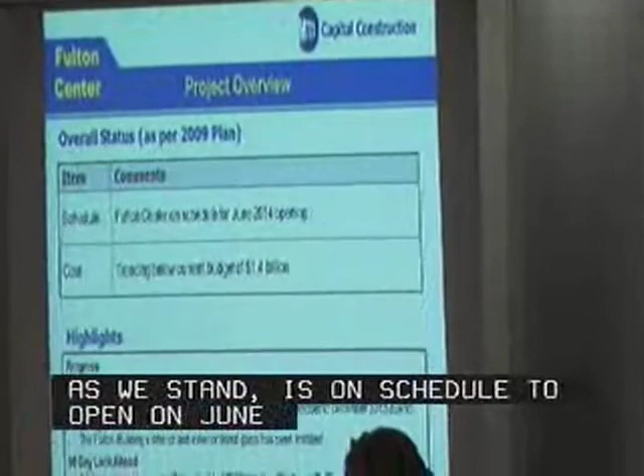Fulton Center, as we stand, is on schedule to open in June 2014, and we are trending under the $1.4 billion budget. The highlights of the progress is that we have 4 of the 5 elevators and 2 escalators on the AC mezzanine at this point in service. And we expect by the end of the month to have an additional elevator.

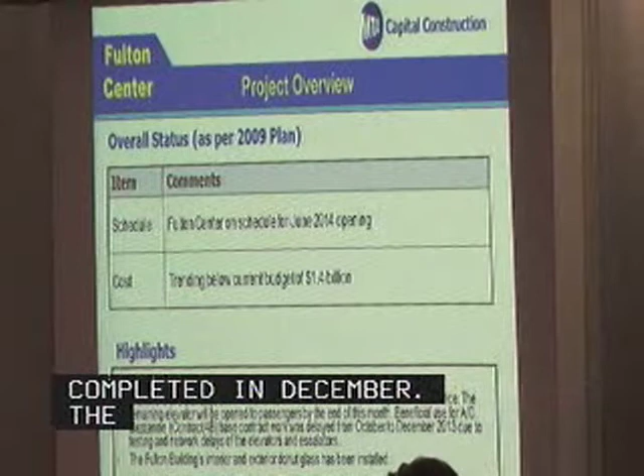So the beneficial use for the AC mezzanine base contract was delayed from October of this year. It will be completed in December. The Fulton building interior and exterior donut glass has been installed, and during the next 90 days we will have additional security scope that will be added to the AC mezzanine.

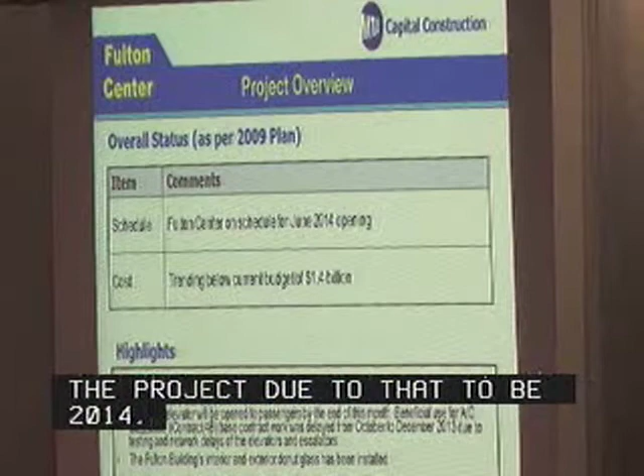The change order negotiated must be completed by 2013 in order for us to be able to use the GOs that start in the first quarter of 2014. So the target is in the next 2 weeks to complete the negotiations. We forecast the completion date of the project due to that to be 2014, although the beneficial use as the project was intended will happen in June of 2014.

Regarding our cost and schedule performance, in terms of the total project cost, the planned amount is the one that was planned for the total of $1.4 billion. Since at this point we are trending below it, and we expect to keep it that way. The third-party construction is slightly more, but we have been able to have on the soft cost part significant reductions.

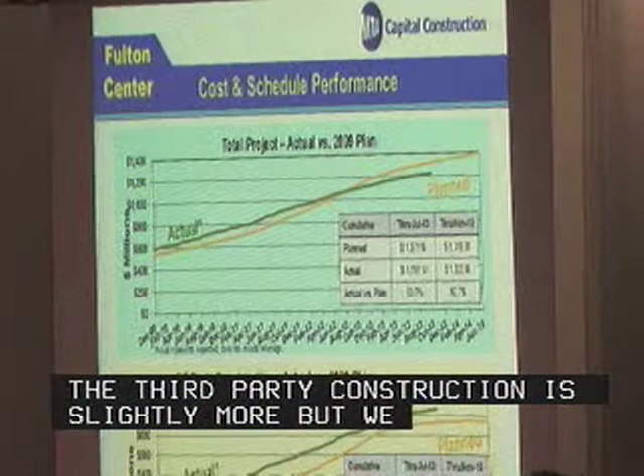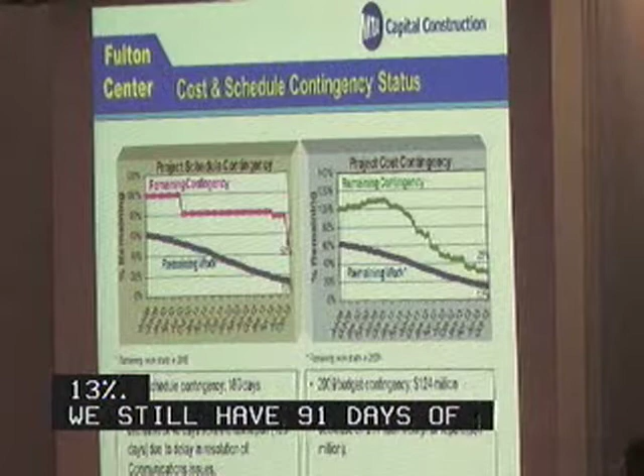The cost and schedule contingency status shows that at this point, in terms of time contingency, we have burned about half of it, while the remaining construction about 13%. So we have still 91 days of contingency at this point. As far as budget goes, the current budget contingency is $36 million. There was a decrease of $1 million from last month.

Some of the critical milestones, a master leasee, and this was something that was just voted for the Finance Committee, so we can now remove that as a critical activity.

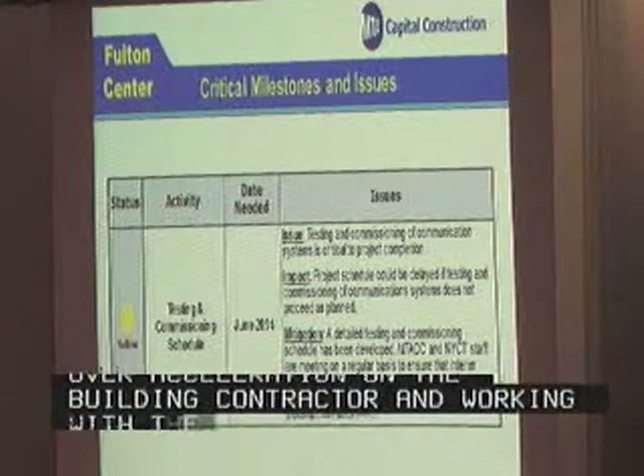We continue to do our testing and commissioning, and again, it's critical that we do it right. We have a detailed testing and commissioning schedule that has been developed by New York City Transit staff and our staff, and we're meeting regularly. At this point, we're looking at opportunities for acceleration on the Fulton building contractor, and we're working with them to accelerate somewhat. We want to create additional contingency time to the extent possible. That's as much as I can say about Fulton.

IEC project review of Fulton Street? You want me to click for you? Oh, you did, I don't know. That's a deal I'll have to think about, Michael. In our review of the project, we'll charge you for it. I'm afraid of that, but I'll get a volume discount, I'm sure.

In our review of the schedule and budget for the committee, we note the project schedule has slipped some 75 days since our report in September. The contingency remains a concern for us as to whether it's enough for managing any further delays to communications, the fire alarm, police radio, and other essential systems for the building's operation. We feel substantial improvements are needed in the testing and commissioning process to assure the June opening.

Project is on budget. Our assessment of the cost contingency really is depending on a late change to the design, which is going to put in some digital sign network for the master leasee. We're looking for a hard estimate on that and its implications before we can comment definitively on contingency.

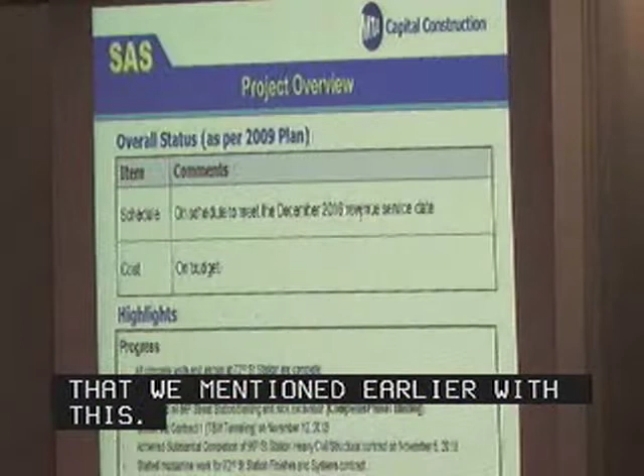Okay, Second Avenue. We are on schedule to meet the December 2016 revenue service date and on budget.

The progress to date: all concrete walls and arches at 72nd Street are complete. Completed restoration of gas and steam at 72nd Street. And at 86th Street, the blasting has been completed, that being actually the last blasting for the Second Avenue project overall.

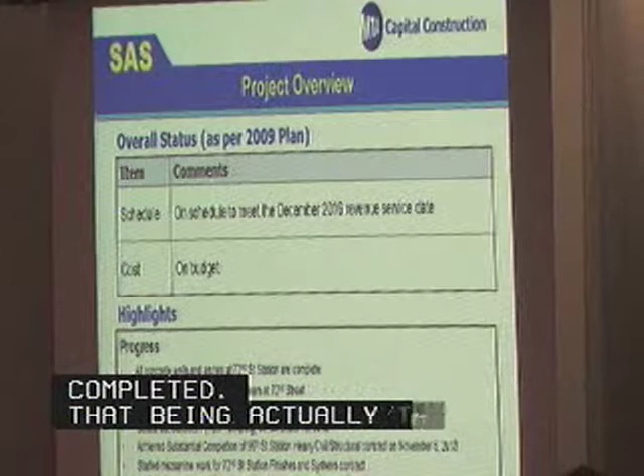We closed out contract one, the TBM tunneling, achieved substantial completion of the 96th Street heavy construction, and started the mezzanine work for the 72nd Street finishes and systems contract.

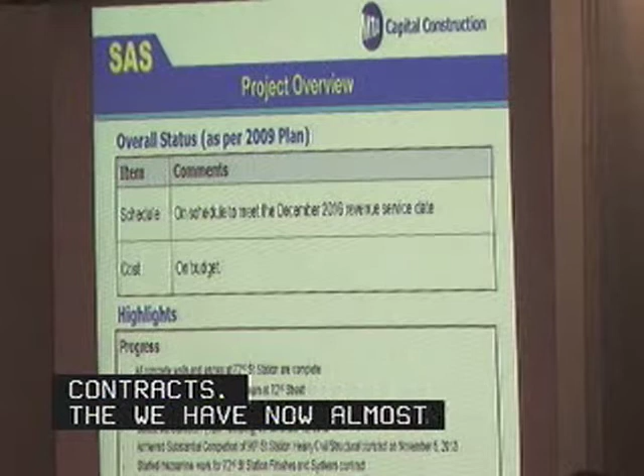We have now almost completed the removal of the muck house at 69th Street, and that will be completed in the next week or so.

90-day look ahead: we have additional gas work and structural steel underpinning at entrance 1 at 63rd Street, and we expect to achieve substantial completion of the 72nd Street heavy civil construction.

We're right now at 97.6% completion, and starting fabrication of facility power equipment at 96th Street. The arch concreting at 86th Street will start shortly as well.

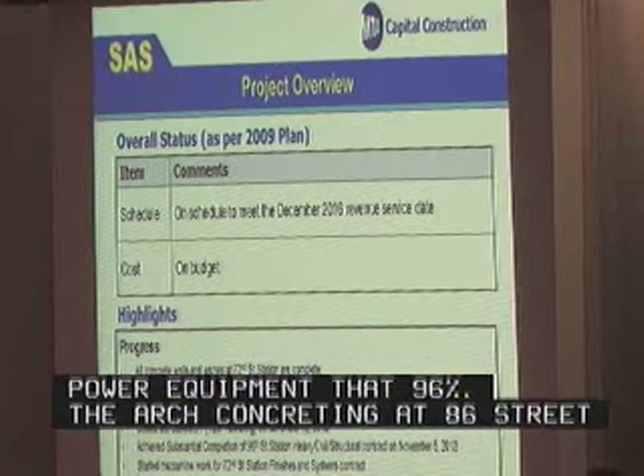In terms of cost and schedule performance, the overall cost is way below plan because we received very good bids and we have a lot of money in contingency. So both for construction and overall, when you look at the plan versus construction, we are below it — not because we're not making the burn rate, but because we're going to burn less money.

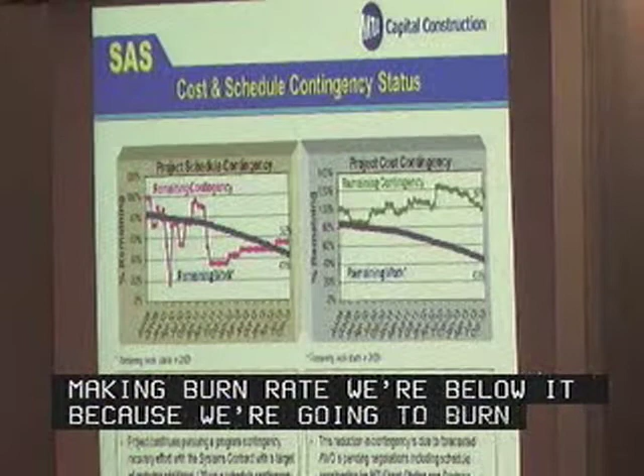When we look at the schedule, you could see that the contingency has been up and down for a while, and now is on the upswing. At this point we have 102 days of contingency, about 55% of the contingency, with about 43% of the time used. We're working right now to add another 120 days of schedule contingency with the system contractors, which will give us a better cushion of time for completion.

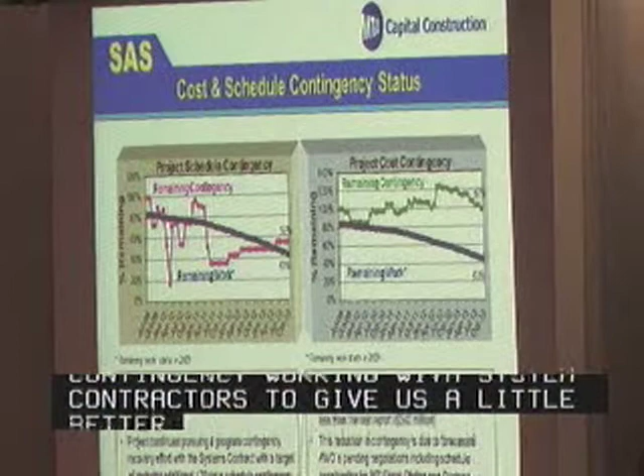Regarding the dollars, the current budgeted contingency is $312 million left. That is about 97% of the contingency, with 43% of the contract remaining to be constructed.

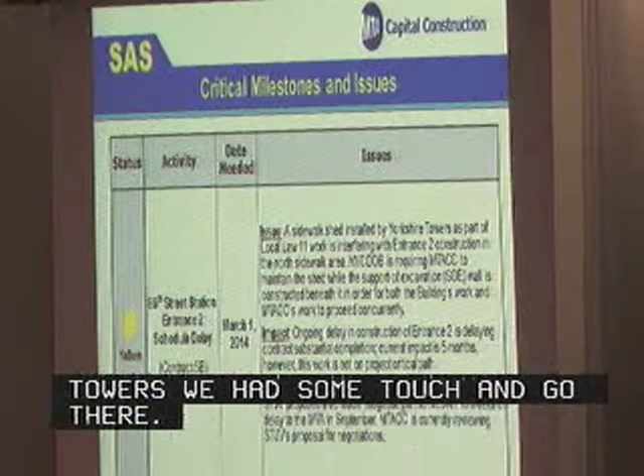The various critical milestones and issues: at 86th Street Station, entrance 2 had a scheduled delay — this was the Yorkshire Towers. We had some touch and go there, but we were able to mitigate it. We worked through Local Law 11 issues that were interfering with our creation of a cavern below. Long and short, that was finished and overcome, and we're working now with the contractor to mitigate the delays it created. But the work itself has been done by now.

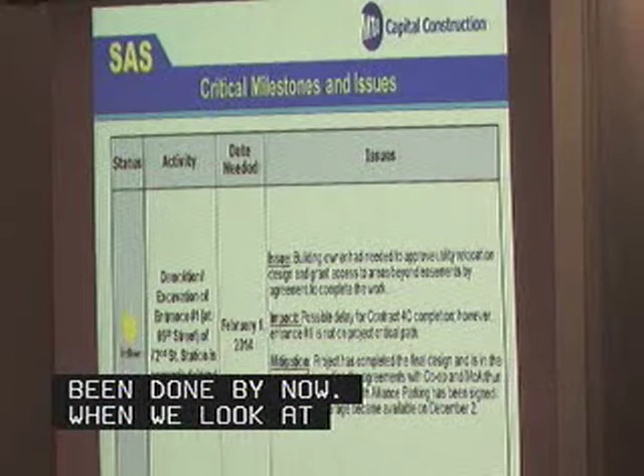When you look at 69th Street — this is entrance number 1 at 72nd Street Station — we had a long-standing issue with the building owners at 301 East 69th Street. We are now at the point that we've had extensive negotiations, and I was told we are signing the agreement today. So that particular issue is going away, and we can now proceed with the construction.

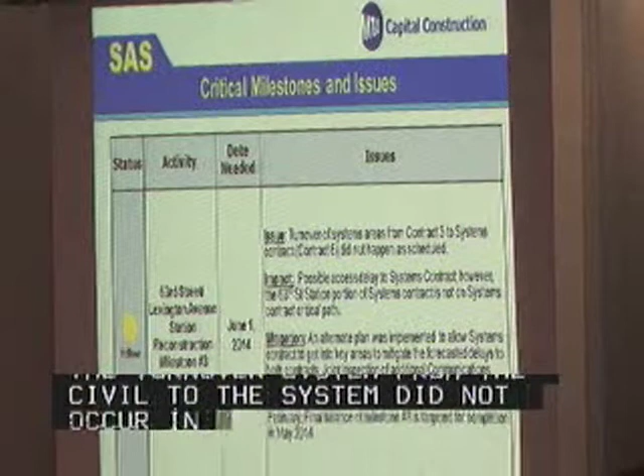This is the 63rd Street Lexington Avenue Station. This area is of particular concern because the turnover of systems from civil to systems did not occur on a timely basis — our contractor was late in delivering. We are, at this point, creating an alternative plan and working to mitigate that. Luckily, this is not on the critical path, which helps, but we are working to mitigate it anyway.

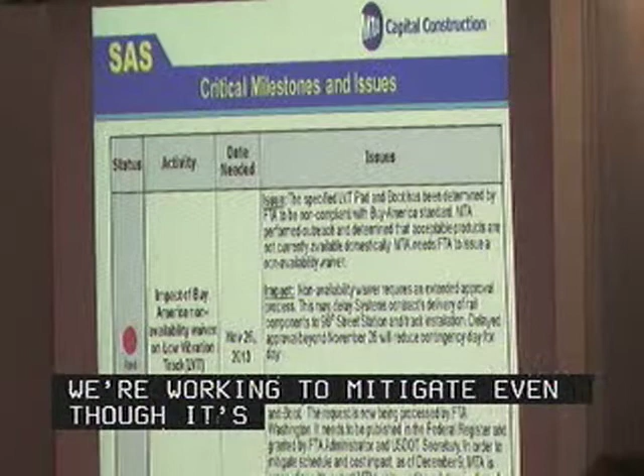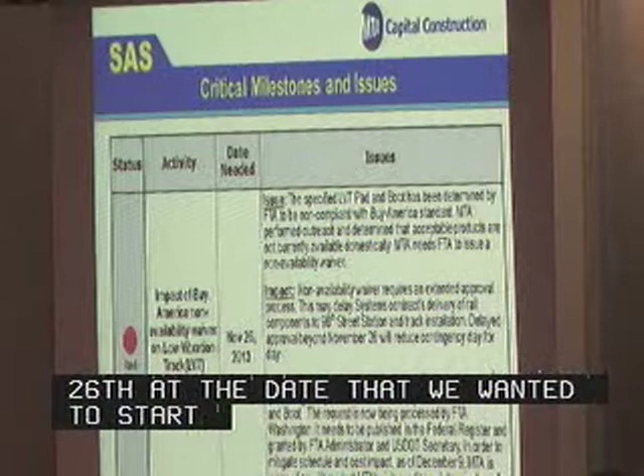The biggest issue here is the impact of the Buy America non-availability waiver. We have applied for one, and the feds have looked at it and are now publishing it in the Federal Register — nevertheless this is a rather slow process. Our critical path showed November 26th as the date we wanted to start construction; we're not able to do so. We have sent a letter to the FTA requesting the Buy America non-availability waiver, and we've also sent a letter saying that unless we hear from them by December 9th, we are willing to start the construction at our own risk.

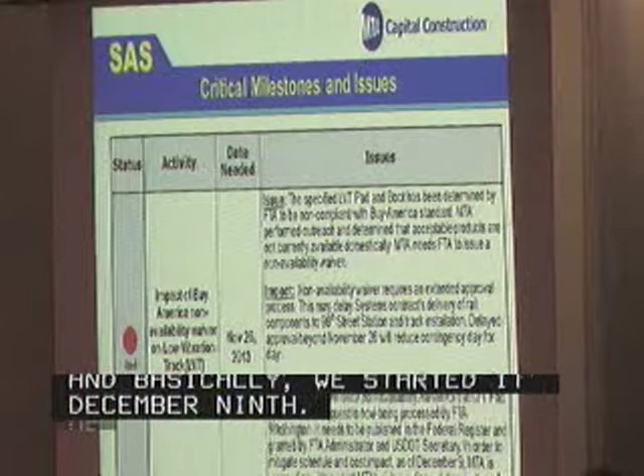Basically, we started at December 9th. We have lost about 12 work days in the process, but we expect to make it back on time, and we do expect to get the waiver in place. So we believe that at this point we have dealt with this, but we're still waiting on the non-availability waiver to be in place. The station facility power is also here.

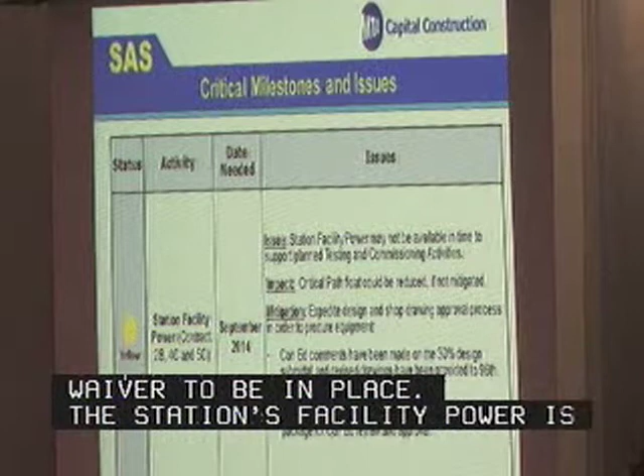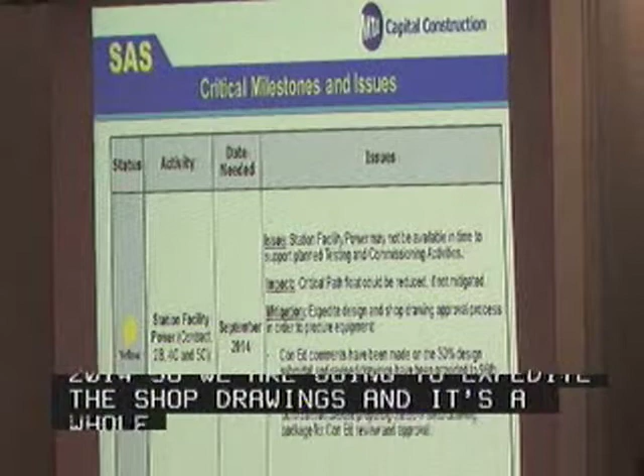We've learned from our Number 7 project that Con Ed's power is always a challenging thing to achieve and to get, and we are now trying very hard to make sure that happens on a timely basis. We need it by September 2014, so we are expediting the design, shop drawings, and the whole process to make sure there is a timely reply from Con Ed. But we keep that as a potential issue that we'd like to focus on to make sure it does not turn red. That's about it.

In our review of this project for the committee, we agree the project's on schedule. We do share the project's concern that additional cushion in the schedule contingency is needed. We see three things prominently pointing to that: one, the federal waiver that Michael just talked about; second, the likely delay to the provision of permanent power to the stations; and third, the extended duration of the systems contract itself, something brought out in our risk assessment of that contract, still remains unmitigated.

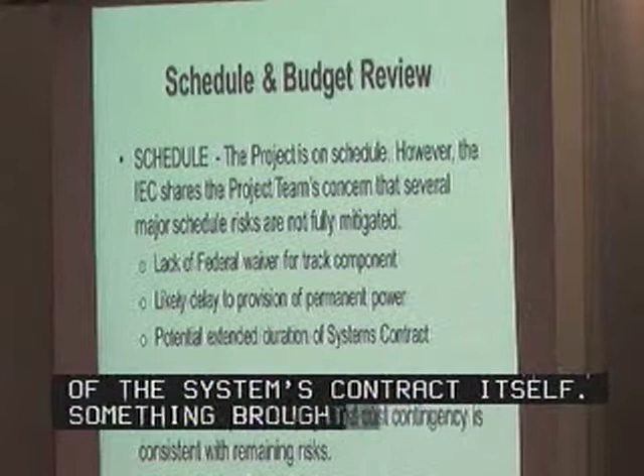The project is on budget. We feel the cost contingency is consistent with the remaining risks. We do want to bring to the committee's attention what we feel is a notable success with the 72nd Street Station mining and lining contract. This will be completed shortly. It's under budget by about $18 million at our last look, and within a couple months of its original schedule. This in spite of the blasting event we all experienced last August, Superstorm Sandy, with a delay in materials to the project which shut it down for a few days, and a continuing challenge dealing with community concerns over air quality, noise, and vibration. So we felt that in spite of those things, the project's construction management team has done an excellent job bringing the project home, and Capital's own community outreach program also deserves some credit for this success.

Looking to our recommendations, the only thing remaining deals with the turnover process talked about earlier. We brought this concern to the committee before, with the execution of turnovers from the finish contractors who were building rooms and putting in doors, floors, and lights, to the systems contractor, which is equipping those rooms with the gear necessary to make the railroad run. The project stumbled a couple times with initial turnovers at 63rd Street. These things are important for the success and for the revenue service date forecast, and we've given a couple recommendations for improving that process. This is something we'll be looking at closely in the next few months to see what improvements can be made.

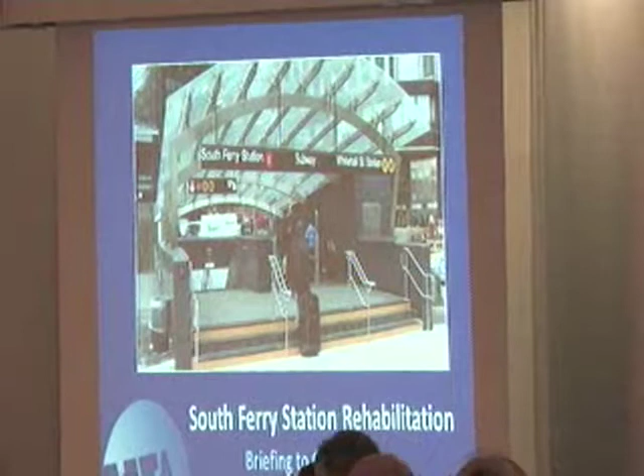Good afternoon, I'm John O'Grady. I'm Program Executive for Sandy Recovery and Resiliency for CPM, New York City Transit.

As we look at this first slide, we see that there's station signage on the top. The station signage calls for entrance to the South Ferry Station as well as the Whitehall Street Station. You'll also notice that there's a gentleman trying to carry his travel bag up the 3 steps. So this highlights 2 issues with the South Ferry Station.

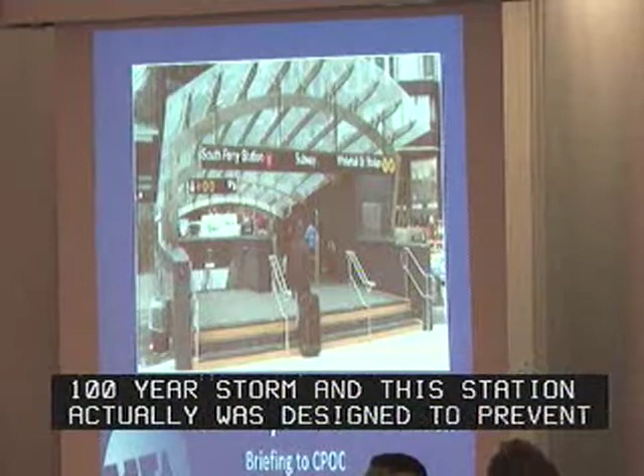It highlights the fact that initially it was designed for a 100-year storm, that's the 3 steps up. So this station actually was designed to prevent flooding. Furthermore, it was designed to incorporate a connection to the Whitehall Street Station, another great passenger amenity that actually wound up making the system more vulnerable, as it allowed for water to flood not just South Ferry, but across through to Whitehall and down into the Montague Tube.

The record storm, as we know, hit the city on October 29th. I'm not going to belabor the storm too much, except for the fact that we had done an extraordinary job preparing for the storm. It overwhelmed those preparations, and at the same time, it clearly overwhelmed the design parameters for which the South Ferry Station was designed. We are now elevating our design requirements to resist a storm that brings a surge accompanying a Category 2 storm plus 3 foot extra.

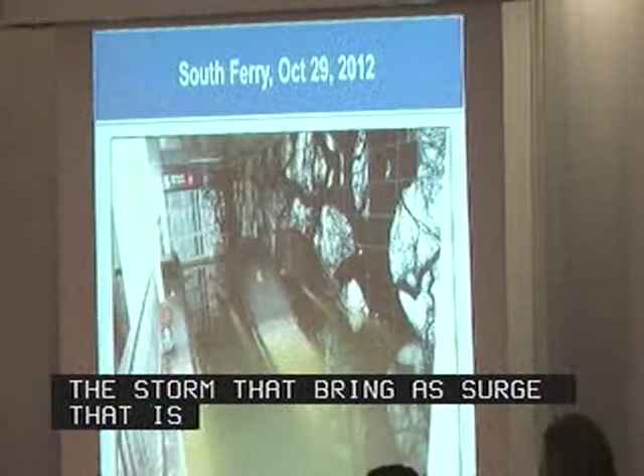As you can see in the third photo here, the station was flooded with over 14 million gallons of brackish, salt, highly contaminated, fouled water. It took close to a week to pump out the station from all the water and remove some of the larger components of debris from the station.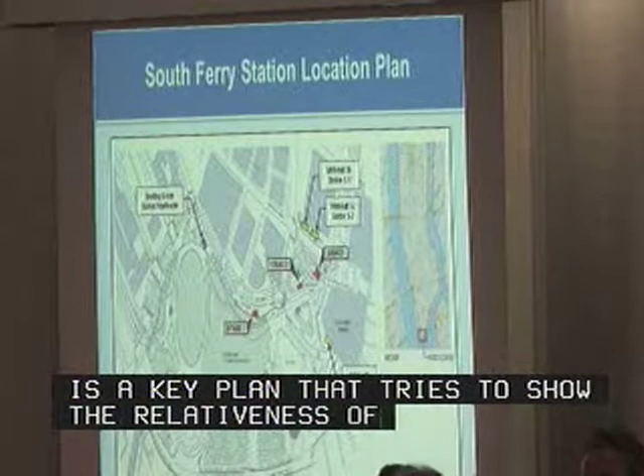What makes the station vulnerable is this key plan that tries to show the relativeness of the Whitehall Street Station. You can see on the slide the 2 light green entrances, station entrances S1 and S2, that connect over to entrance 1 of the new South Ferry Station. The new South Ferry has 3 entrances, entrance 1, 2, and 3.

And then, of course, a little bit further up on the slide, you get to see the Bowling Green, trying to show the relative nature of 3 major transit components of the overall transit network. If we move to the next slide.

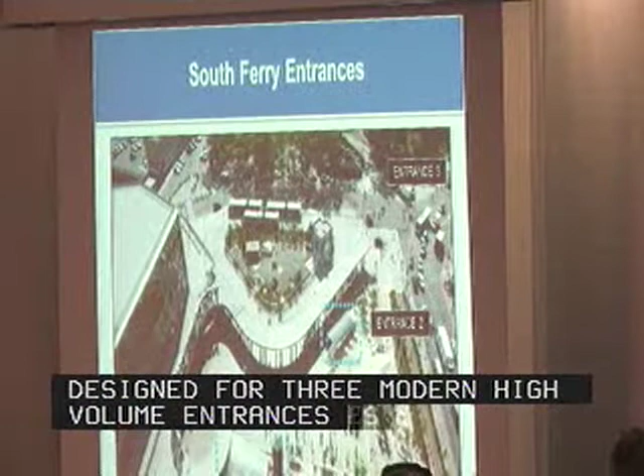South Ferry was designed with 3 modern, high-volume entrances to allow for the surge traffic of the arrival of the Staten Island Ferry. These entrances on their own provided a large volume conduit into the station when water flooded. So as much as we needed the wide entrances to accommodate passenger flow, it wound up being a weak point for the system because it allowed a large volume of water to quickly flood the system.

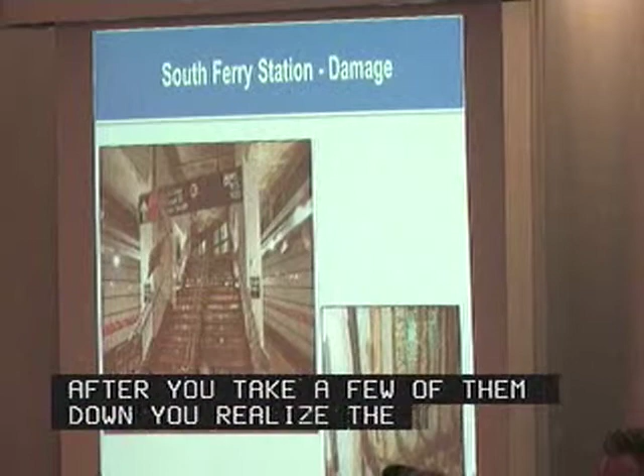Damages aren't necessarily immediately obvious. You start to clean out the station, you see that the porcelain wall panels look like they're okay. It's after you take a few of them down that you realize the damage the moisture has done to the mounting brackets that hold these components up. We can't have those brackets fail and allow the wall panels to fall onto the tracks.

More insidious, though, is the damage to electrical and mechanical components, as illustrated by the photo on the lower right-hand corner. Corrosion of cable, any connection point, any terminal board, any splice point, basically puts the system at risk of a failure, and it is something that needs to be remedied.

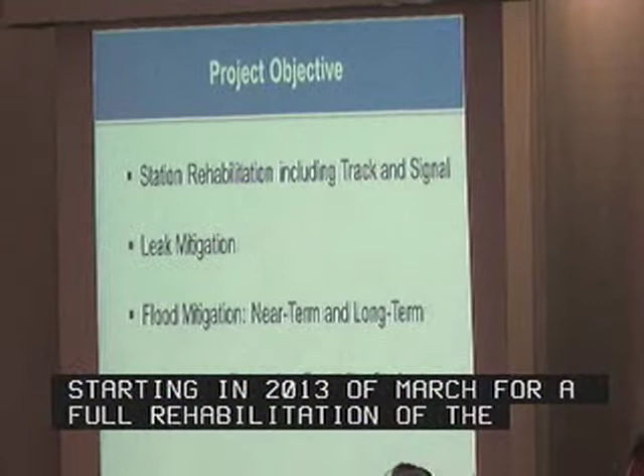So we embraced the project starting in March of 2013 for a full rehabilitation of the existing South Ferry station. This basically means the station will be gutted down to the concrete, and we'll be putting in all new systems, all new finishes, all new lighting, all new mechanical network, all new signal systems, etc. We also will be including necessary track and signal work, which is unusual for a station rehabilitation.

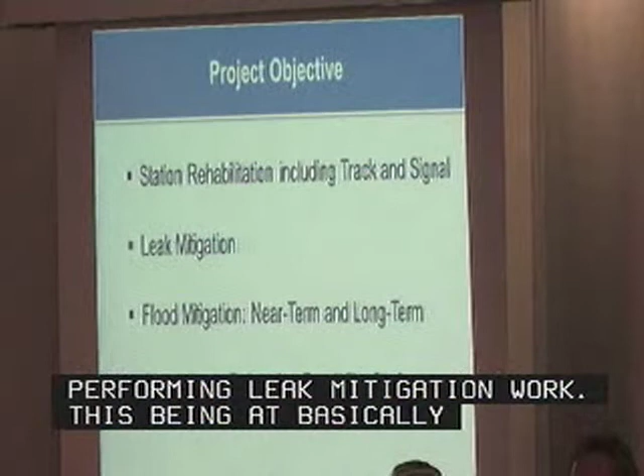Along with that station rehabilitation work, we will be performing leak mitigation work. This being basically a station sitting in reclaimed water and landfill, it's highly vulnerable to water infiltration. Even when it opened, it had a good bit of cracks that allowed for leakage into the station. These cracks were exacerbated by the flooding and weight of water caused by Sandy. So we'll be going in there with a very aggressive program to seal off these leaks.

We will be embracing both near-term and long-term flood mitigation as we move forward, and to make this station fully resilient, we are looking at the feasibility of relocating the most vulnerable component of the station, the signal relay room, to a point above grade where it does not flood.

To get there, we're breaking this project down into construction packages. We have a near-term mitigation package, which was awarded in September of 2013. That package is closing 2 of the entrances that are not necessary currently.

As everybody knows, the South Ferry Station has been closed since the storm. So we had entrance 2 and 3 that provided a vulnerable access point for water should we ever have a storm like that again. So we're closing them down on a temporary basis until this project can come along and reopen these entrances such that they're capable of withstanding a Category 2 hurricane flood.

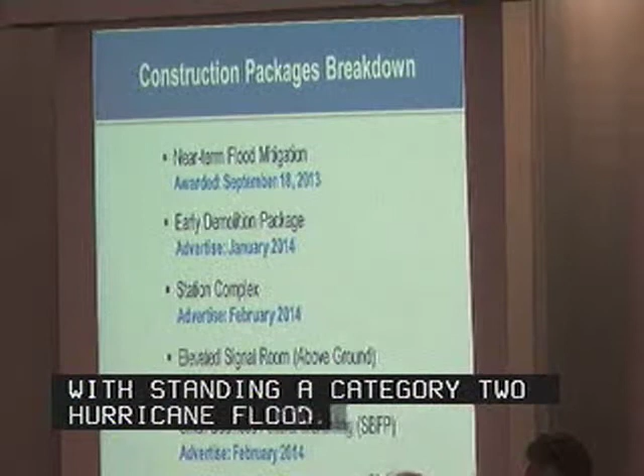You're talking about closing down entrances to the old South Ferry Station or the new one? No, we're closing down the entrances to the new South Ferry. Well, nobody's using it, so it shouldn't affect anybody. That's correct, it doesn't affect anybody. It's just that there's concern over that. But they're flooding points, so that's why they're closing them down.

We're also doing other mitigation as part of that early near-term mitigation. We are going to be advertising an early demolition package, removing all unnecessary components within the station, essentially preparing the station for the larger contract work. The station complex work, the overall package, will be advertised in February with a planned May-June award. We are going to continue to study an elevated signal room, and we are looking at our current contract packaging to see what projects, if any, can be broken out for small business mentoring.

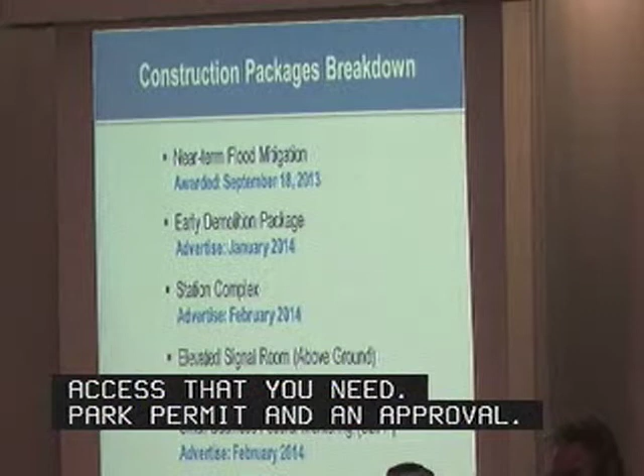One of the problems with this location is that there is very little access. Any construction access you need requires park permit and approval, and we're going to have a problem with multiple contractors in this area. We also are procuring a consulting construction management firm to manage the project on behalf of Transit.

The South Ferry Station, as you look at it, let's see if I can show the pointer here.

It bleeds out, but entrances 1, 2, and 3 are on the top along State Street. So we'll be hardening those entrances such that in the event of a storm, we'll be able to come along and close a door flap, close and seal off those entrances. The rest of the entrance itself will be designed for a Category 2 storm, so everything will be completely sealed off at street level.

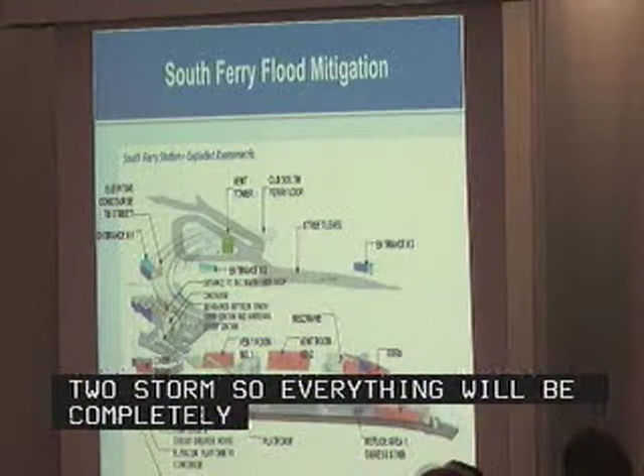As you move down the station, we're doing second-tier hardening. We're hardening, for example, the connection point between South Ferry and Whitehall. It doesn't really quite show up here, but where that connection is, we'll be putting in a barrier to prevent water from surging across and through from one station to the other.

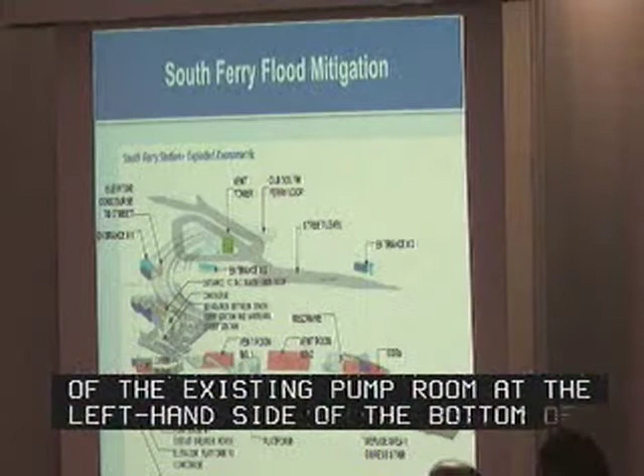We will then be taking the hardening and bringing it down to platform level. We will be expanding the capacity of the existing pump room at the left-hand side at the bottom of the drawing there, basically doubling the capacity. We'll be hardening the rooms along the platform.

And then finally, as you get to the lower right-hand corner, you get to the signal relay room. That's basically our largest challenge now as we move forward. The signal relay room is the most vulnerable room in the station complex, and yet it's at the only really good location within the station that it can be.

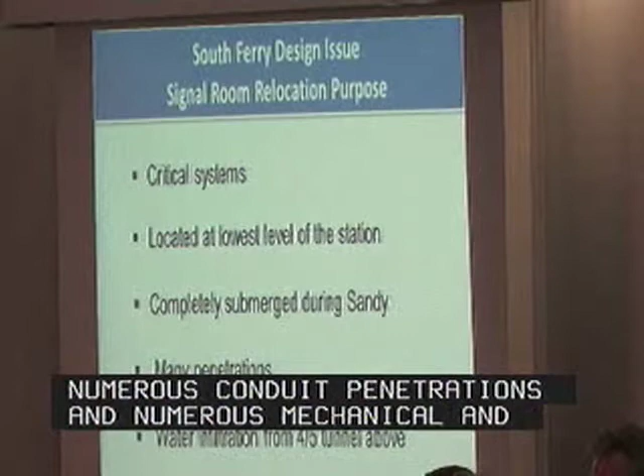It houses all the critical signal systems. As I said, it's at the lowest level of the station. It was completely submerged during Sandy. It has many different wall penetrations. This is a room that's 20 feet wide by 110 feet long, so it has numerous conduit penetrations, mechanical louvers, doors, and vents. It's also vulnerable to water infiltration from the IRT 4 and 5 line above.

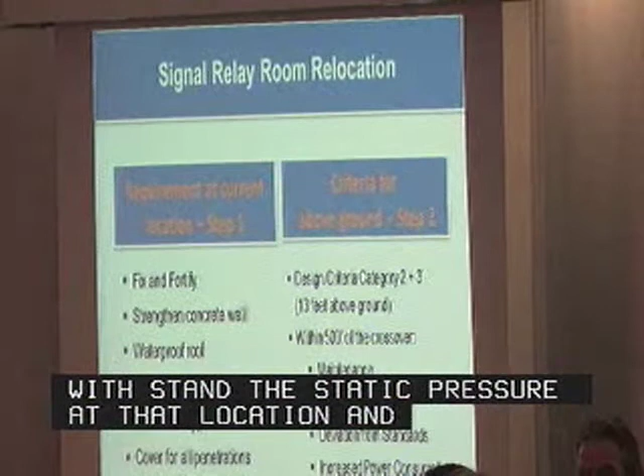So our approach currently is to harden it in a two-step approach. The first step would be to harden the room in its current location. We're going to take advantage of the term fix and fortify. We're going to strengthen the concrete wall to withstand the hydrostatic pressure it would be under should it flood again at that location. We'll be waterproofing the roof and installing submarine-type doors to close off in the event of another storm like Sandy. We'll be having deployable covers for all penetrations such that the room will be made as watertight as possible in its current location.

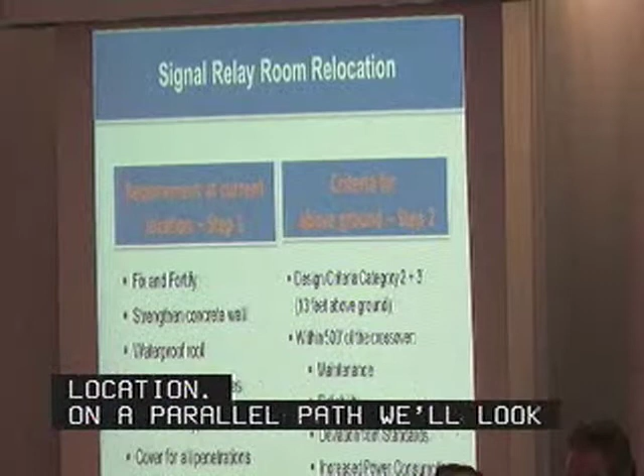On a parallel path, we're going to be looking at every option to bring the room above grade. There are requirements to that—it's not as easy as just putting it above grade and finding a spot. It has to be within 500 feet of the crossover, which is the track switch that allows you to move from track to track. That 500-foot rule is there for maintenance and reliability reasons, so it creates quite a challenge.

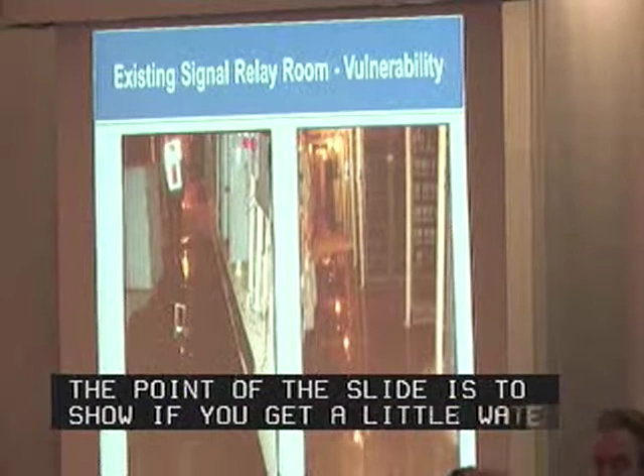But from the next slide, you can see that the existing relay room is vulnerable to even a small amount of water. The point of this slide is to show that if you get a little bit of water on the floor, that may be okay, but as it starts to rise up, it starts to get into the relays that terminate in the racks you see in these photos. So we don't have any real true resiliency in this complex unless we get this room above grade.

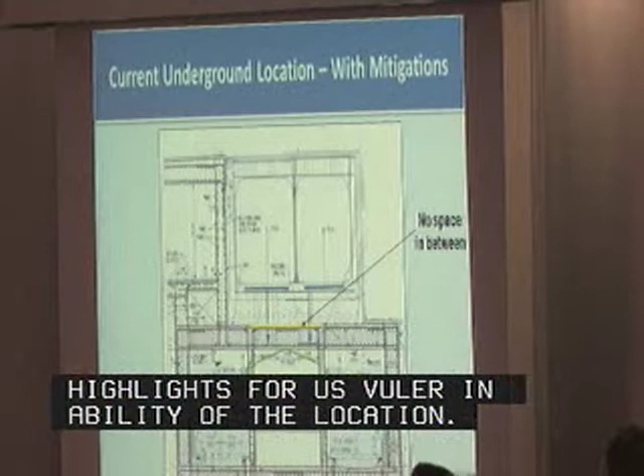So as I said, this is just a plan view of the relay room where it currently is, hardening every aspect of this room to the point that we can, as well as hardening the entry points to the station at street level. But the IRT above, the next slide, highlights the vulnerability of the location. Essentially, we have a 100-plus-year-old track and structure configuration above us that has its own issues, and it can leak from structure to structure, basically leaking into the relay room. So we're going to try to build a roof within the room, but even there we have very little headroom to deal with.

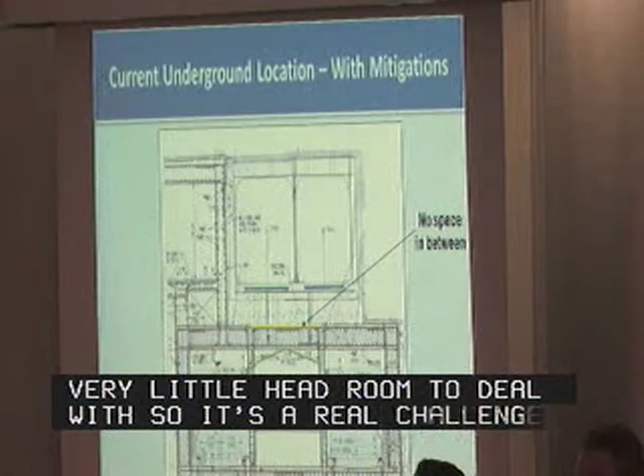So it's a real challenge. As you can see in this photo, water on either side of the relay room, if the tracks flood even to a nominal height, can enter this room and cause substantial issues. The signals themselves are the long recovery item with this project, bar none.

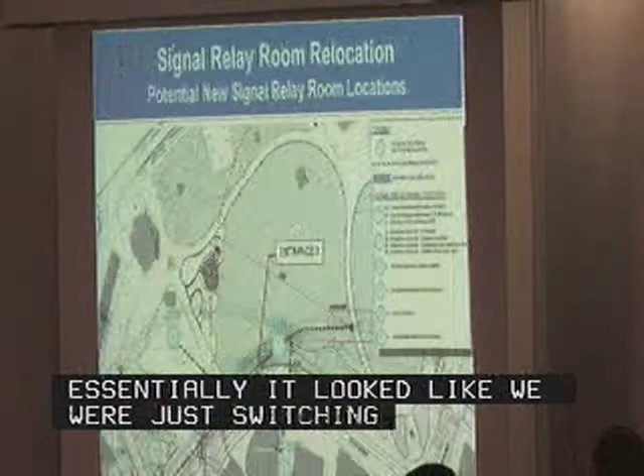We were asked as we were putting this presentation together about other locations. We did look within the station, just for full disclosure, and essentially it looked like we were just switching one problem for another while still not really achieving full resiliency. Above grade, we have a problem—we would have to go into the park. So we've looked at all locations within the park, and there are no good locations in Battery Park for us.

The only good thing about the arrangement is that where we are is along the perimeter of the park. Actually, we're along the sidewalk, and that sidewalk does not belong to DOT, it belongs to Parks.

But with the property being Parks property, we know we're in for a long process. Even if everybody buys into putting this room above grade, the alienation process to take that parkland, even with all parties agreeing, would be quite substantial. So we've reached a point of decision on the direction we're moving forward with.

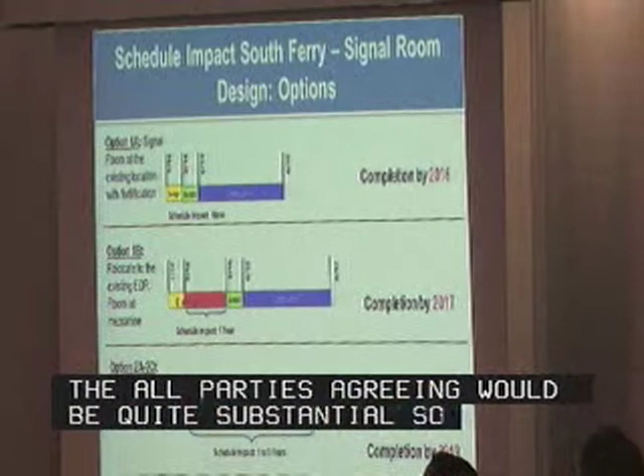We're moving forward with the first option, hardening the room in its existing location. That is the path that takes us to a completed project the quickest. We will be finishing the project by the end of 2016, so we're in a 24 to 30 month duration.

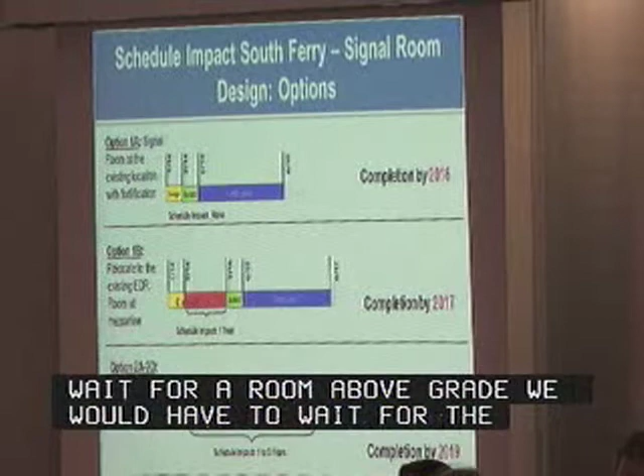If we were to wait for a room above grade, we would have to wait for the process to play out. It could be involved, could be challenged legally numerous times, and we might not get approval, in which case we'd be waiting in vain. But even if successful, we feel it would add 1 to 3 years to the project duration. So if we waited for that, at best we'd be at the end of 2017, to as late as 2019.

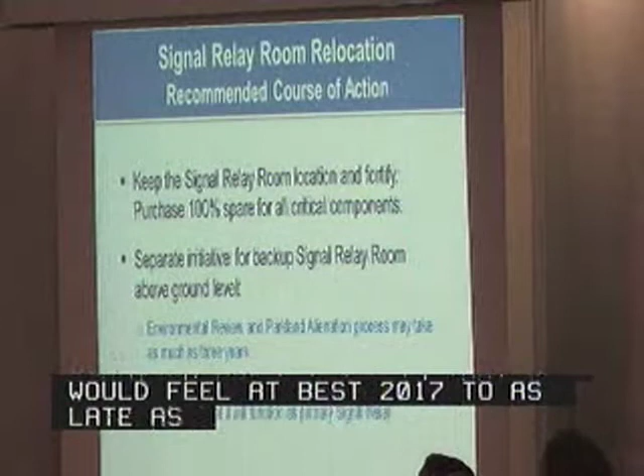And we don't think we can wait for that, which brings us to the course of action we're on: hardening the room in its current location. We will purchase 100% spare signal components to be able to recover should we ever have any form of flooding event again. And we'll begin on a parallel path to seek out a room above grade to the maximum extent possible, using this as a fallback facility until it's approved and built, at which point it would become the permanent facility for the relay room. And at that point, we would have a fully resilient South Ferry Station.

The one comment I didn't make as we went through the presentation is that at this point we are well within the allocated budget for this project. I'm not here to talk about total dollars yet because we're just finishing the design and getting the final estimates done, but we expect to deliver this project well within the allocation in our Sandy funding. Thank you very much.

I think the group has done an excellent job dealing with a very difficult situation. And while this may be a one-off that we may not face other places, there may be derivatives of this that we will face. Ideally we'd like to take actions that were permanent and one-time expenses. This is a case where we may need to do something different. And as we get to some of the more challenging assets we need to harden, especially on the resiliency side, you may see more of these. But the process they went through, I think, was good.

And we make sure we communicate this very clearly to the FTA, because they want to make sure we're spending our resiliency dollars and recovery dollars wisely. Any questions or comments?

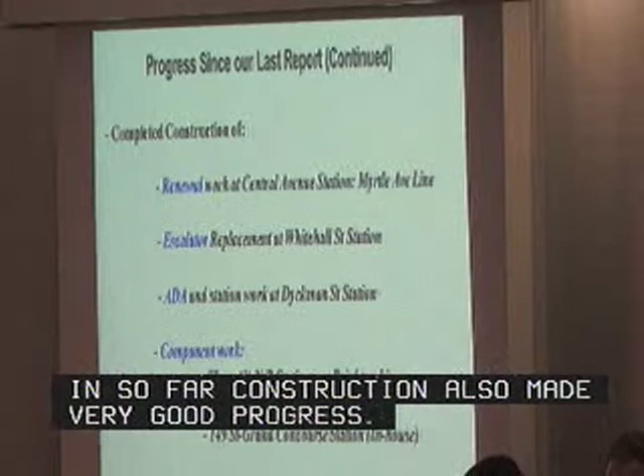We also awarded 5 stations on the Liberty Avenue line, and elevator and escalator projects were also awarded. In terms of construction, we also made very good progress. Central Avenue station on the Myrtle Avenue line was reopened on time, and earlier this year we completed Knickerbocker, so overall that line's work is going very well. The Whitehall station escalator was put in service, and this week we are putting Bowery station in service. Finally, we also completed the ADA work at Dyckman, along with 5 other component works at 5 other stations.

Dyckman, everybody knows, was a big challenge for us, but I think we put it in service now. In terms of the component work, the 3 stations on the northbound side, we put it in service ahead of schedule. At 149 Grand Concourse station, this work was completed by our in-house force, and it turned out to be very good. In fact, New York One has a very good article about this project. Also, the 5 station on Broadway, I talked about it.

Now, this is our overall capital program for stations. Total work included at 187 stations with 4 major categories. You can see the major effort is component work, and I put in a real plug for the component station program.

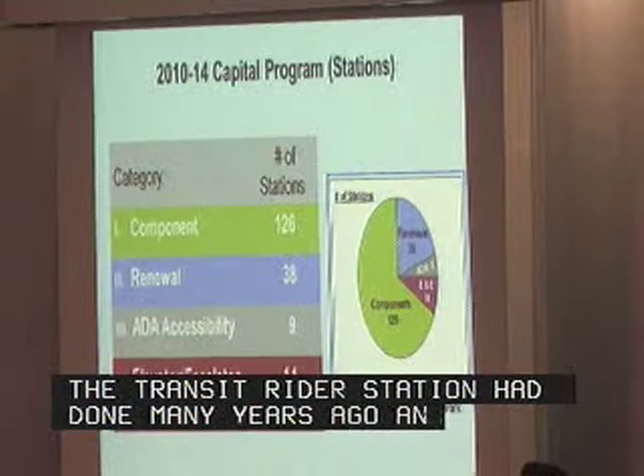The Transit Riders Council had done, many years ago, an expose of some stations, and 149th Street Grand Concourse was really decrepit, and it is so much better now. The rubbing boards are firm, the platform edges are nice, there's no dripping paint. It's just so much better for the morale to be in that station. And as you see, it did not have to wait for a major renovation to do these things. So, good job. Thank you.

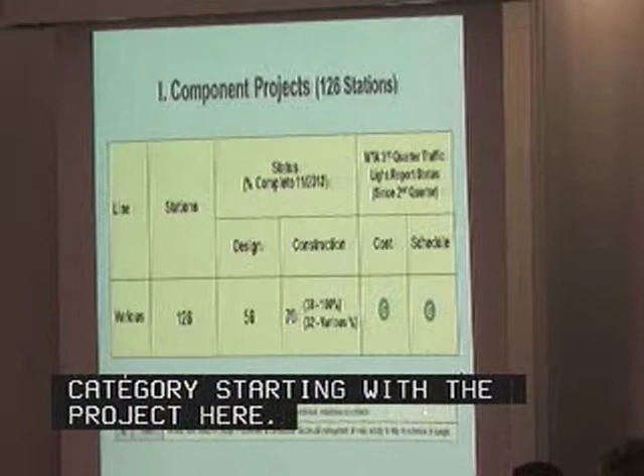All right, so again, this is the overall capital program. Let's look at the progress under each category, starting with the component project. As you can see, work at 126 stations is included in the current program. Under this category, we address defects which are rated 4 or greater at the various stations. Also, typically the dollar amount, like Andrew was saying, is very small for work under this category, so we always look for piggyback opportunities.

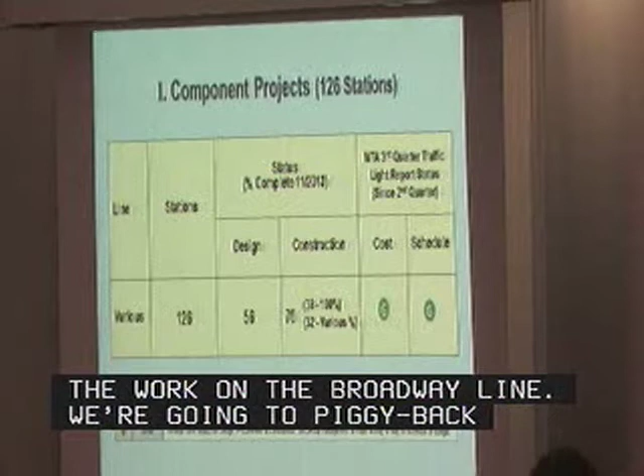Point in case, the work on the Broadway line, we're going to piggyback all the Montague Tunnel GOs. So far, we have completed work at 38 stations, 32 is in construction, and the rest are in design. If everything goes well, we expect to complete design and award all the remaining work by end of next year. Overall, work under this component category is within the budget and on time. As you can see, the traffic lights are all green.

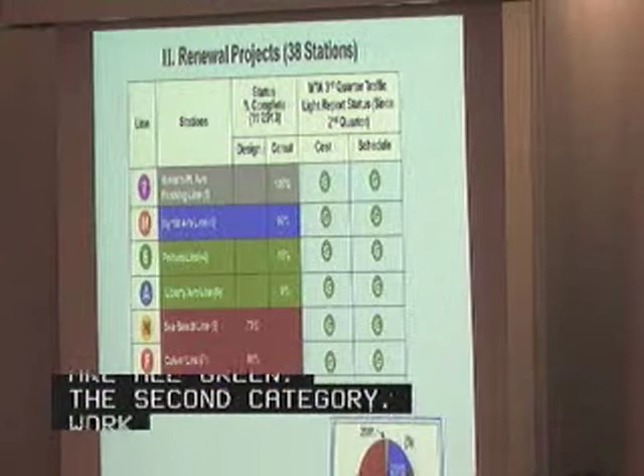The second category is the renewal category. Work included at 38 different stations. Under this category, we address defects which are rated 3 or greater. Typically, work under this category requires bypassing the stations or closing a station for a while, which we work with the community on, and we come up with the plan.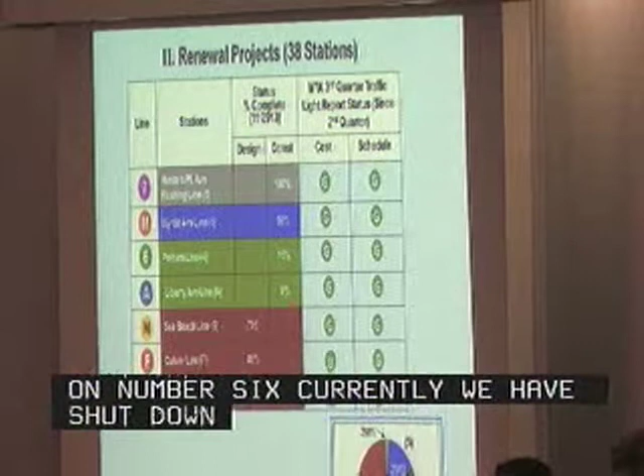As you can see, the Hunters Point Avenue work is completed. On Myrtle Avenue line, Central Avenue station was completed on time, and Knickerbocker completed earlier. Work at the remaining 3 stations is going well and expected to be completed early next year. On the Pelham line, that's the number 6, currently we have shut down Castle Hill and Middletown Road stations for construction work. It was, I think, a major issue to agree on the schedule of the closure. So our government relations office and local community all agreed with the closure plan, and we are in construction, and it's going very good.

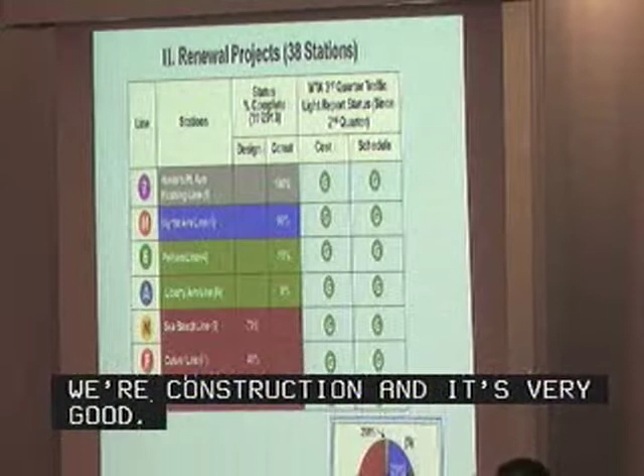Liberty Avenue is recently awarded, and Sea Beach line is in design and is 70% complete. Also, the Culver line and the New Lots line are in design, and they are at 40% and 15% complete. Again, overall, work under this category is also within the budget and on time. You can see all the green traffic lights.

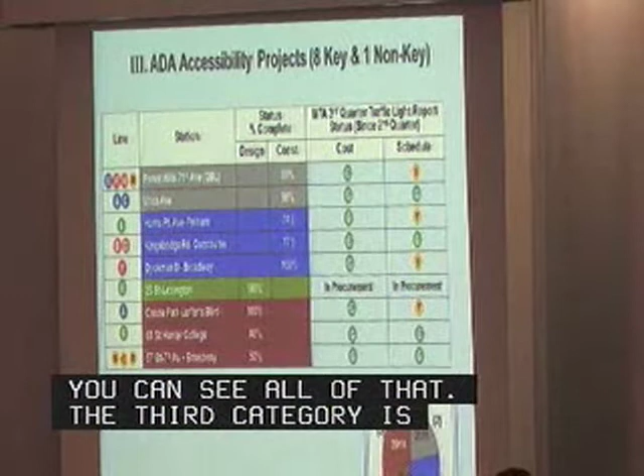The third category is the ADA work, and MTA's goal is to complete 100 key stations by 2020. Work under this category also requires some GOs, not major ones, but we do need a lot of temporary enclosures, or barricades, on platforms and other public areas. The work at the first 4 stations in this table is in progress, and as I said earlier, Dyckman is all done.

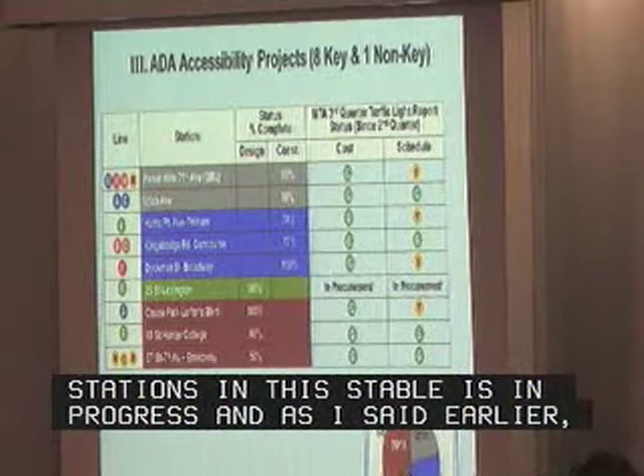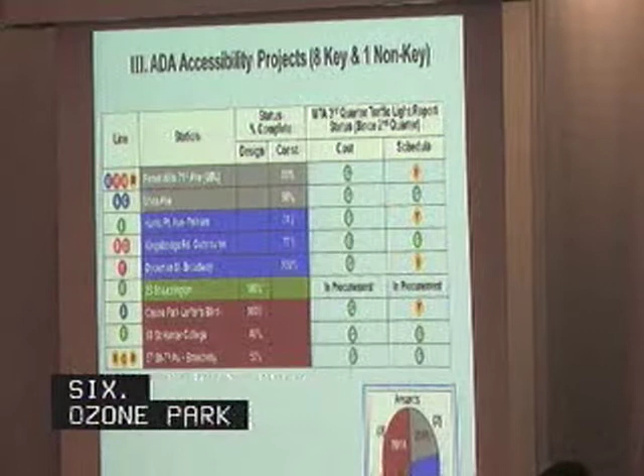23rd Street station, we recently opened the bids, and it was very, very competitive, with bids below our estimate, and we are in the process of awarding that project. Ozone Park stations design is completed, and we're going to advertise very shortly with that project. 68th Street Hunter College, one issue we have is locating the new entrance, and we are working with the Government Relations Office, MTA Real Estate, and the community to agree on the location of this new entrance, which is vital for this station work.

57th and 7th design is going well. The only issue there is the very busy Manhattan location, so we are working with the DOT to agree on a lane closure. At least cost-wise, all this work is within budget. However, we ran into problems with the schedule on at least 4 projects. I'm happy to report that we have resolved all the issues at these 4 locations, and work is well underway.

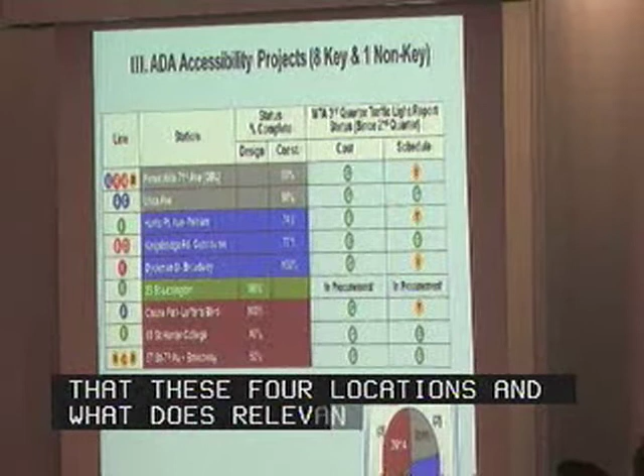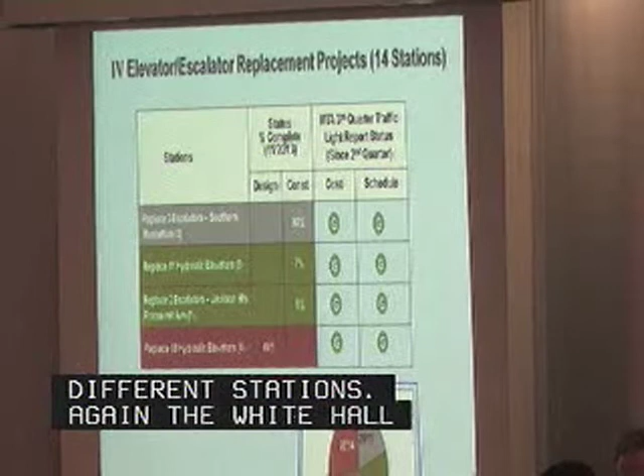The last category is elevators and escalators. Under this work, we also require temporary barricades along the platforms every time we do elevator or escalator work. On the current program, we are replacing 5 escalators and 21 elevators at 14 different stations. The Whitehall station is in service, and Bowery is scheduled to complete this week. Overall, work under this category is also within budget and on time.

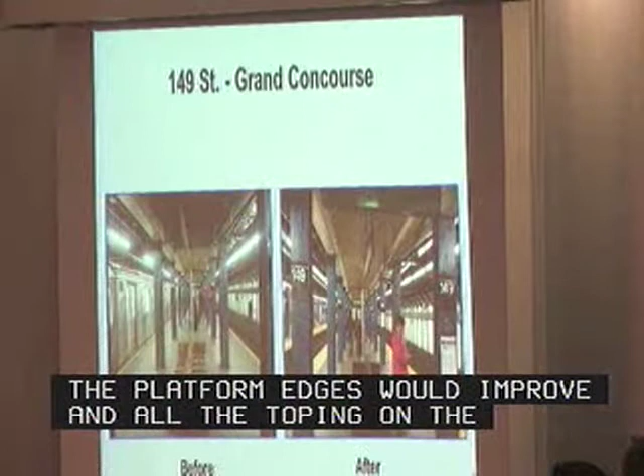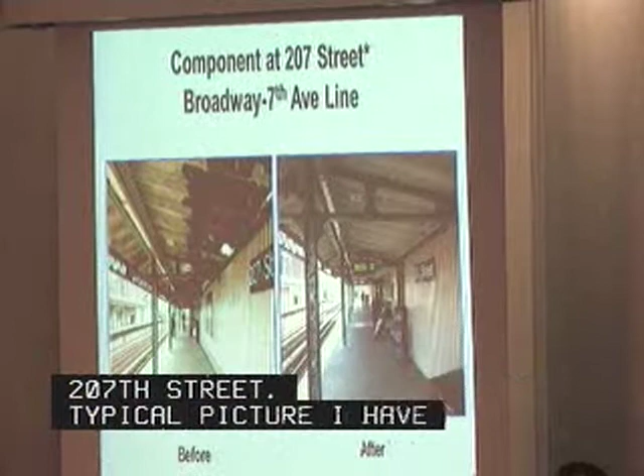This work again is at the upper level of the station. A lot of work was done at the station. This is the Broadway 7th line, the component work at 207th Street. This is a typical picture I've shown. Four other stations have similar work, and they were all completed in October of this year, and everybody's very happy with that.

Now this is the renewal work at the Central Avenue station on Myrtle. You see the brand new control house - on the left was the old one, and on the right is the brand new one. We also redid the entire control area. It had a very bad water condition at this station, but now it's much improved, with a brand new canopy and everything.

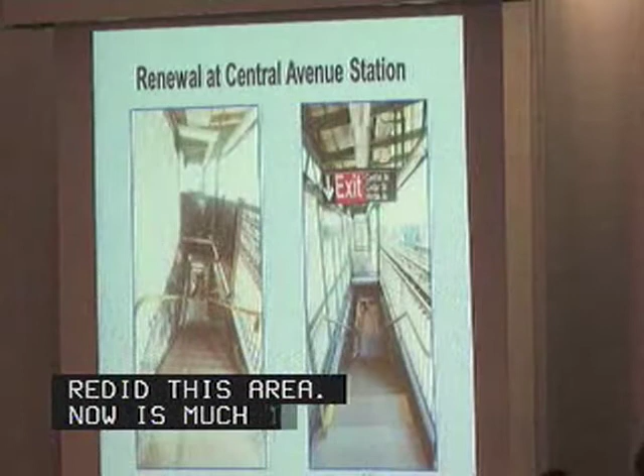We also did the windscreen on the platform, and we rehabbed the stairs at the station.

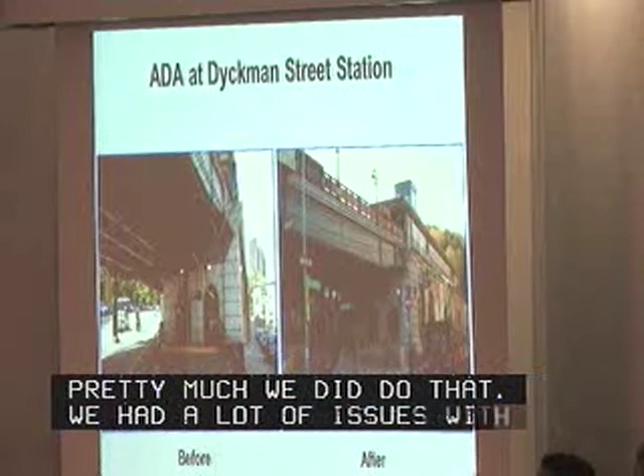The next one is Dyckman. Like I said, this was a very, very challenging project for all of us. However, we are done with that. The ADA elevator was placed in service recently, you can see that. The front entrance of the station was pretty much redone. We had a lot of issues with the sidewalk being uneven, and we had to bring it to ADA standards for our customers, so we had to regrade the entire sidewalk and build the ADA ramp. This is again a photo of the new platform and platform edges at Dyckman on the right-hand side. Also, you can see the elevator on top of the roof.

Okay, thank you very much.

I think you'll see from this presentation, and maybe from others as well, that when we deviated from the traditional way of going after stations on a station-by-station basis - it was just taking us so long to get to 468 stations - this is going to be a lot better, and the quality of the work is really pretty good. I agree with you, some of the pictures don't do it justice.

Any questions or comments from the board members?

Capital program status report. On commitments, through November, the MTA planned 59 major commitments. 27 have been or are forecast to be delivered on time, while 24 others are late. 8 commitments previously reported as late have now been made. Agencies have committed $4.5 billion in forecasts by the end of the year - they will commit 97% of the overall 2013 plan. The strong performance is driven by the inclusion of Sandy commitments, such as New York City Transit's Montague and Greenpoint Under River Tube contracts, which together represent nearly $300 million. Altogether, agencies have so far made $629 million in Sandy commitments.